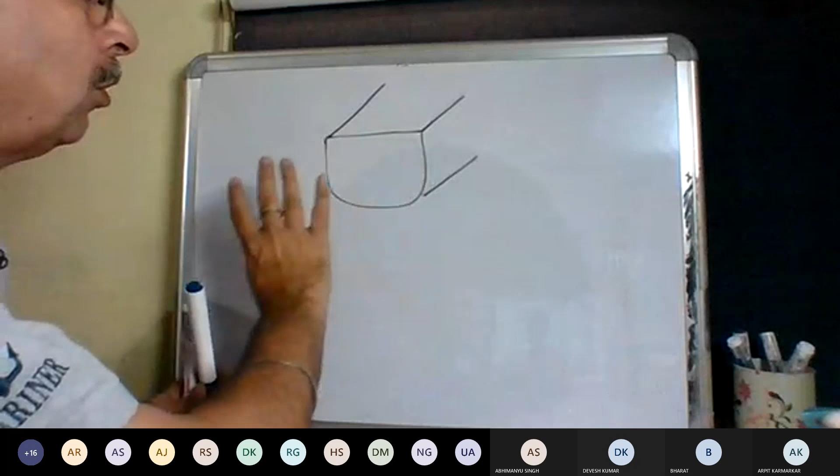Yes, it is now visible, sir. Okay, all right. So if this be the athwartship look of the vessel, and lengthwise like that, then this is your center, the keel blocks as they're called. They're called the keel blocks. So these go along the full length, right? Then you have...

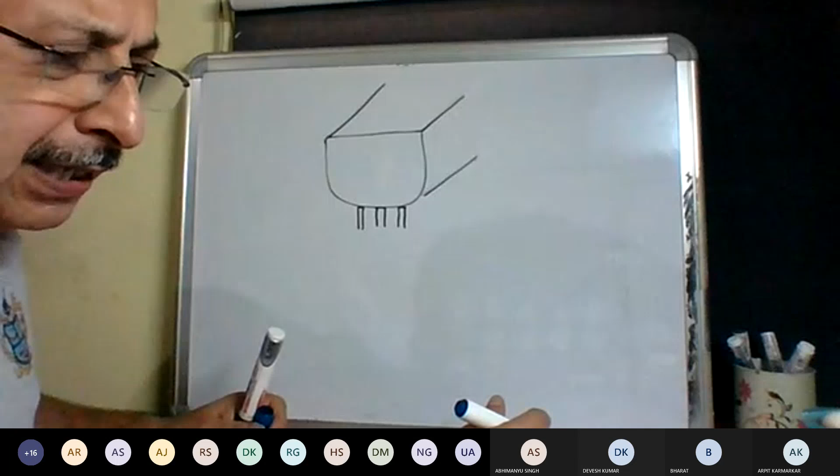Side blocks. These become the side blocks. And depending on the beam, because if our ship's beam is larger, then here you have what is called bilge blocks. So keel block, side blocks, bilge blocks.

Towards the bilge keel, when the curvature comes in the bilge keel, the outermost ones there are called the bilge blocks. Now these are also along the ship's length, all along the length of the ship, running the full length. They're all going along the length, right?

It depends on the beam of the vessel. If the beam is small, then side blocks won't be needed. But if the beam is larger, naturally the side blocks will keep increasing. So that depends totally on the size of the vessel.

Now what happens is, because P is acting like this, there will be a tendency of the vessel to bulge out like this.

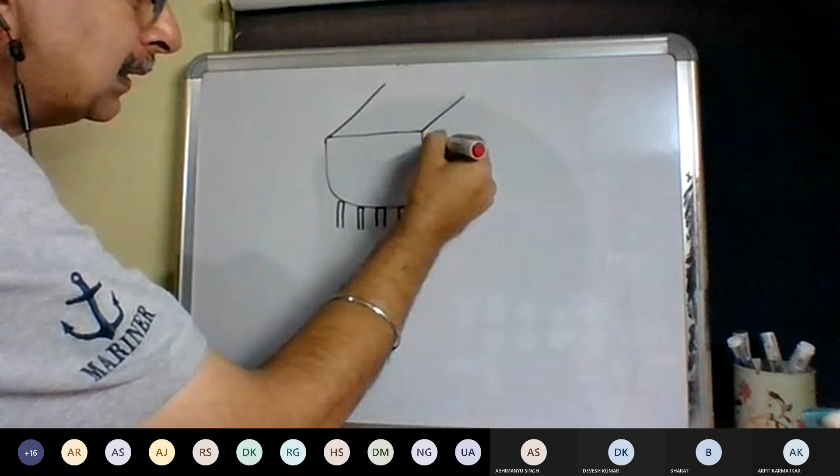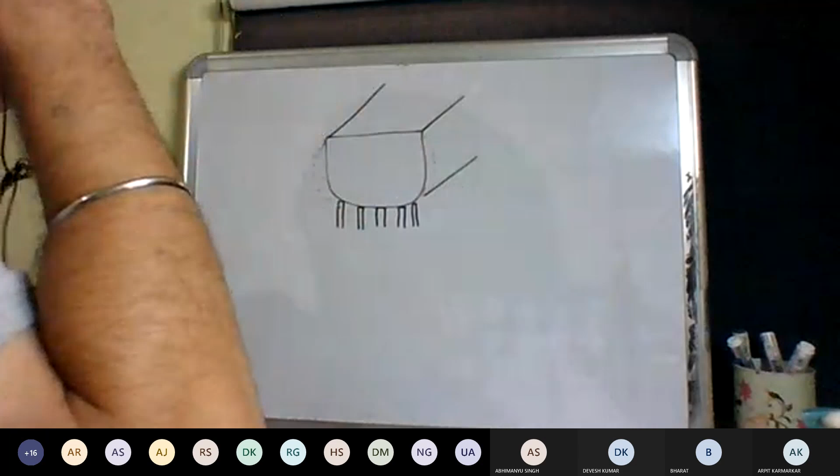There will be a tendency for the vessel to bulge out like this, because of the pushing force on the ship. So in order to prevent that bulging out, some of the older vessels, general cargo ships and all, used to be V-shaped vessels, not a regular box shape. The vessels were shaped like this.

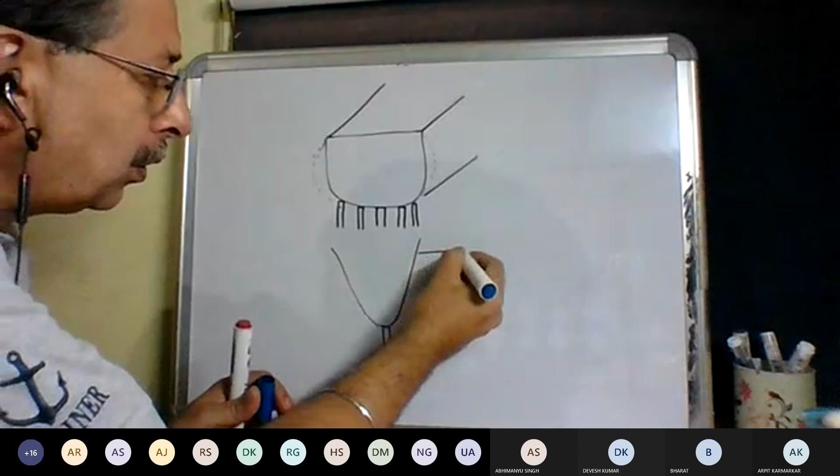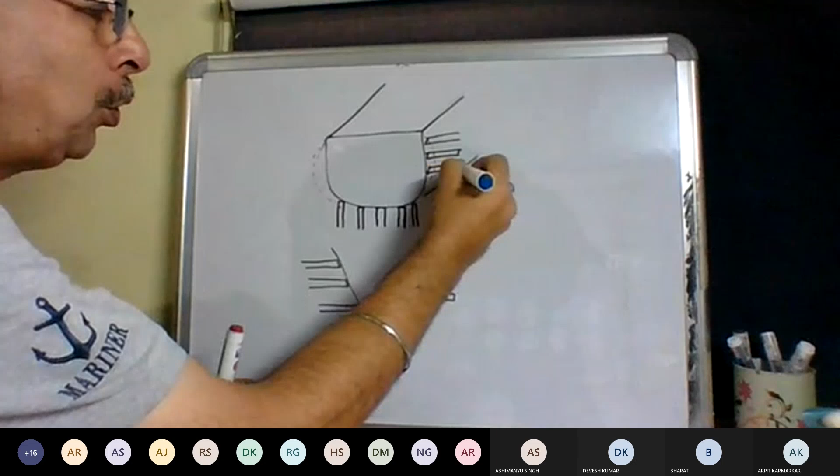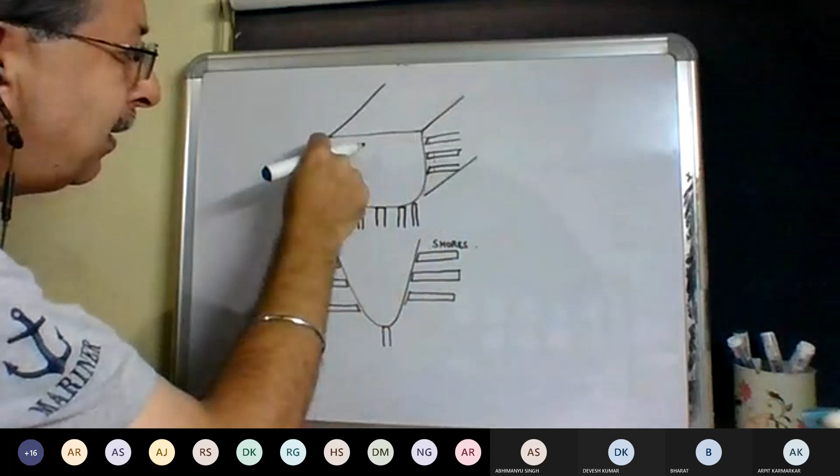So they would do two functions. One, they would wedge the vessel so as to prevent the toppling over. Two, they would prevent the bulging out of the vessel, or the bulging out of the shell plating.

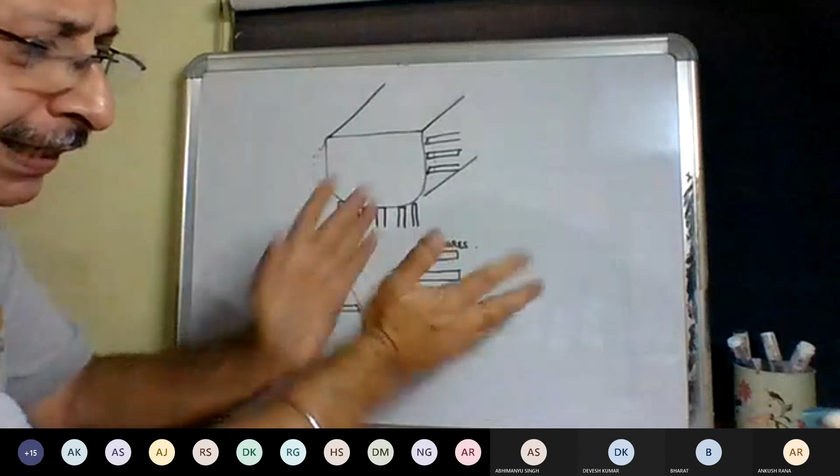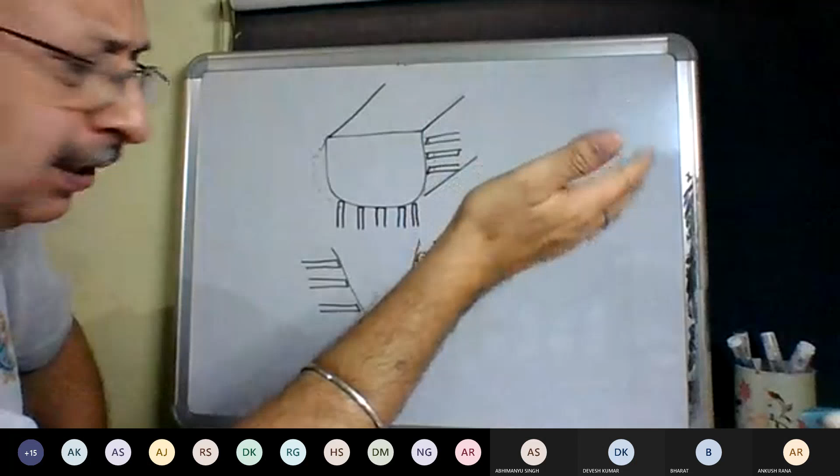So these vessels are susceptible to that, but box-shaped vessels are not. Shores used to be put in the 80s and 90s, and some primitive dry docks still do that. But advanced dry docks today don't have all this shoring business.

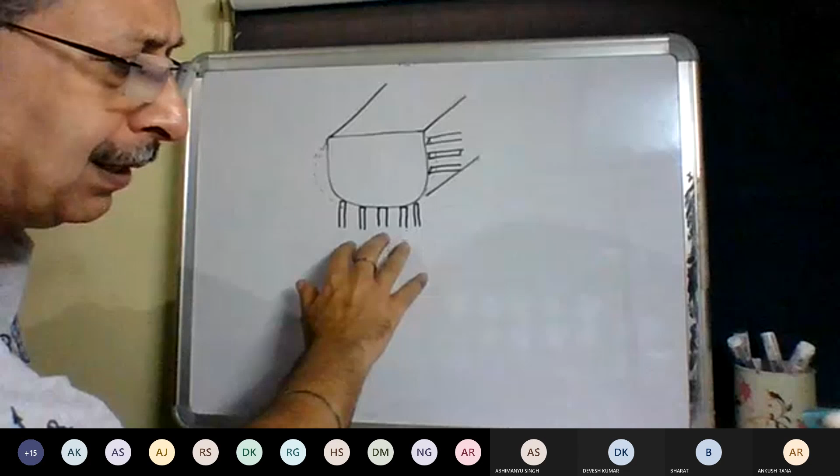So the support is provided by the blocks itself. You just increase the number of blocks, that's all. So in today's time, this shoring is not done. But yes, you should know what shorings are.

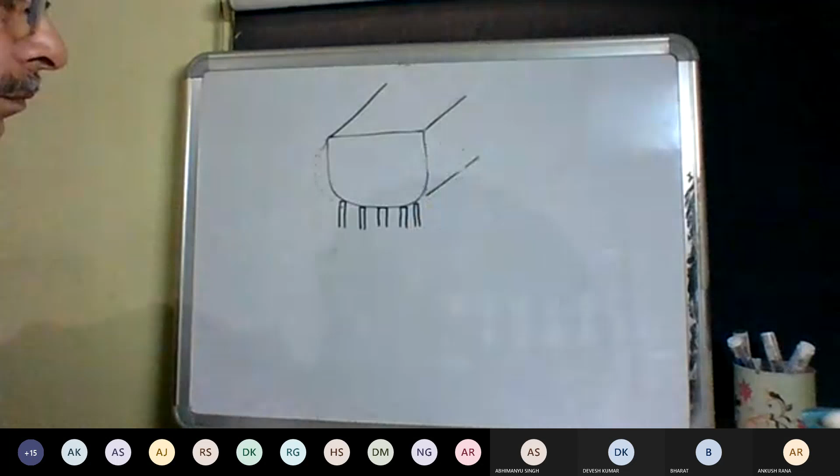Because they ask this in orals. How do we prevent this bulging in the box shaped vessels? How do we prevent bulging out of hull plates? No, you cannot do anything.

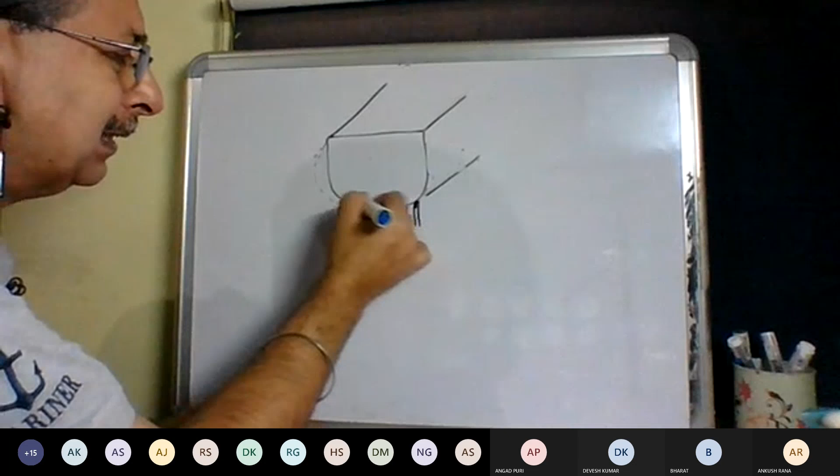What they do is basically put extra paddings on top of these blocks. Teflon paddings, rubber paddings, highly reinforced rubber paddings are put up over there. So they take care of that bulging out. You can't do anything else.

Also in olden times, the vessels used to dry dock for a very long period of time. Once a ship went to dry dock, it would go for 3-4 months. The dry docks were not as efficient as today. So if the vessel has a prolonged stay in dry dock on the blocks, she is more susceptible to this bulging out.

But today our dry docks are minimized. Bulk of the job is done at the repair berth, which is floating. So first we go to the repair jetty off the dry dock, and the work starts there. The engines are opened up, the units are opened up, and we go into the dry dock only for the underwater portion, nothing else. So in reality, the dry dock stay might be just 10 or 12 days.

The shipyard stay, the repair berth stay, might be 15 to 18 days. And therefore the total stay for the repair in totality becomes about a month. As a result, the bulging is less, because the vessel is exposed for a lesser period on the blocks. That is the situation today.

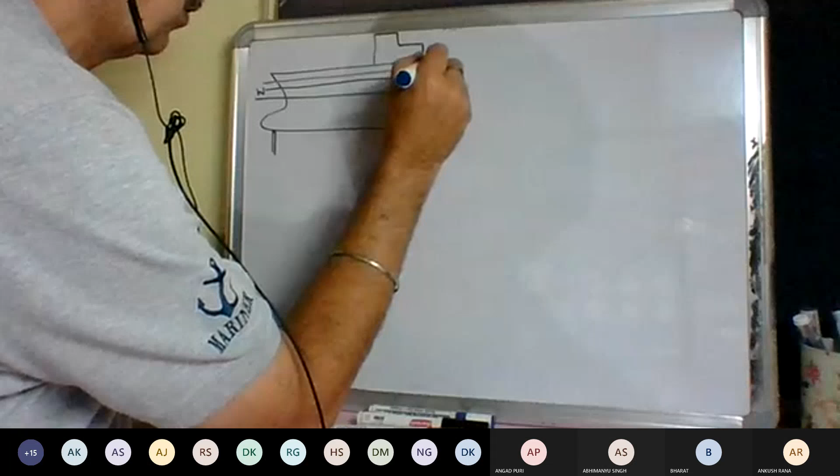Okay, so now let me touch upon one more element of the ship's stability, and that is GM. Let's say at waterline number 1, the KM of the vessel is 6 meters, and the KG of the vessel is 5 meters.

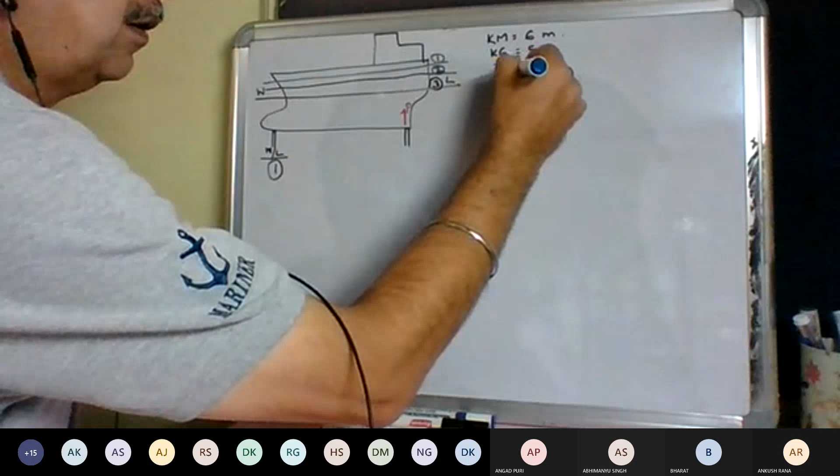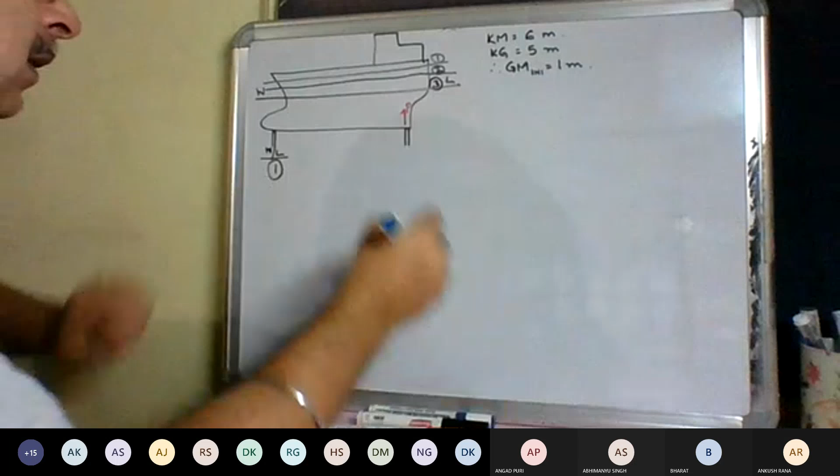Therefore, the GM initial is 1 meter. So at waterline 1, under the column of inference, write down: GM initial is equal to 1 meter.

I'm taking these values hypothetically. I'm just randomly taking some values to explain a point.

Now, when I come to waterline number 2, okay, P will start to act. Will there be any change in the GM of the vessel? That is the question.

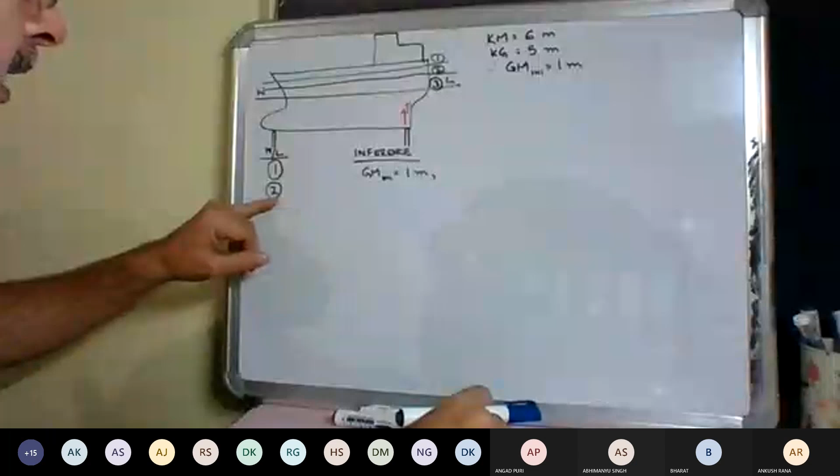What do you think? Sir, please repeat. What I'm saying is, at waterline 2, when P begins to act, as the ship slowly touches the block, will the KG change? If KG changes, GM will be affected. Now the question is like this.

In reality, the KG of the vessel does not change, because the displacement of the vessel is still 50,000 tons. If the displacement is constant, then KG is also constant. Yes sir, it will be constant. That is correct, sir.

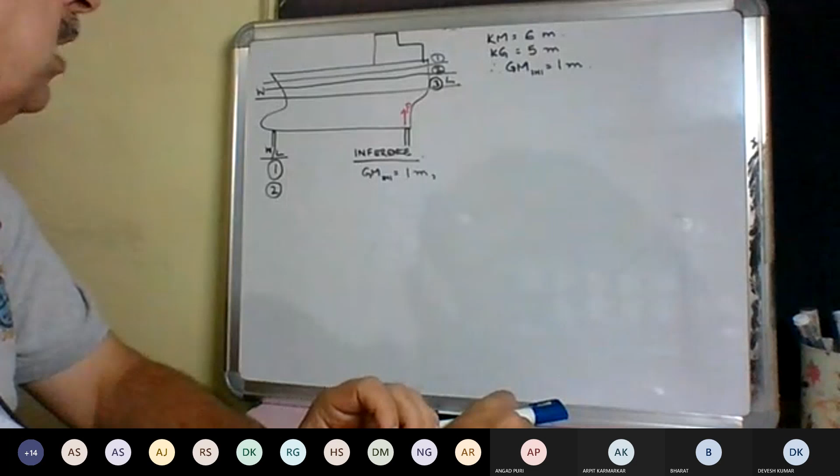Buoyancy will reduce and P force will increase, because I have not discharged any cargo. So therefore, the two basic principles in dry dock are: W remains constant, KG remains constant.

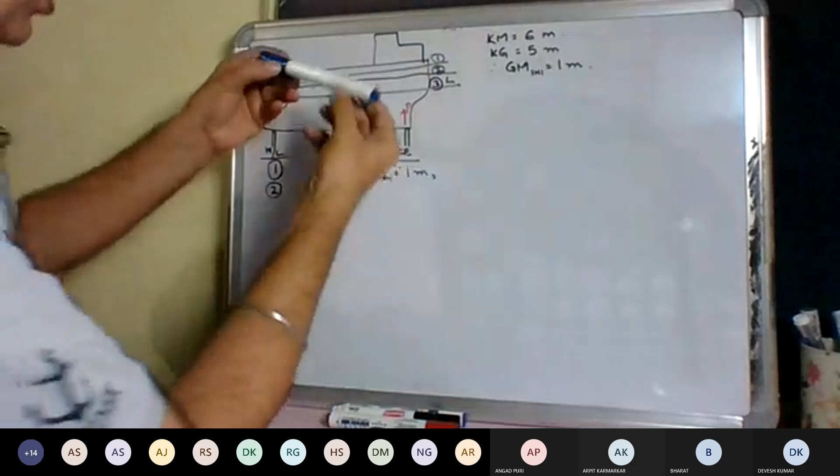Okay, now what happens is this P tons of force which is acting upward is changing the trim of the vessel. And since the trim is changing, the waterline is changing.

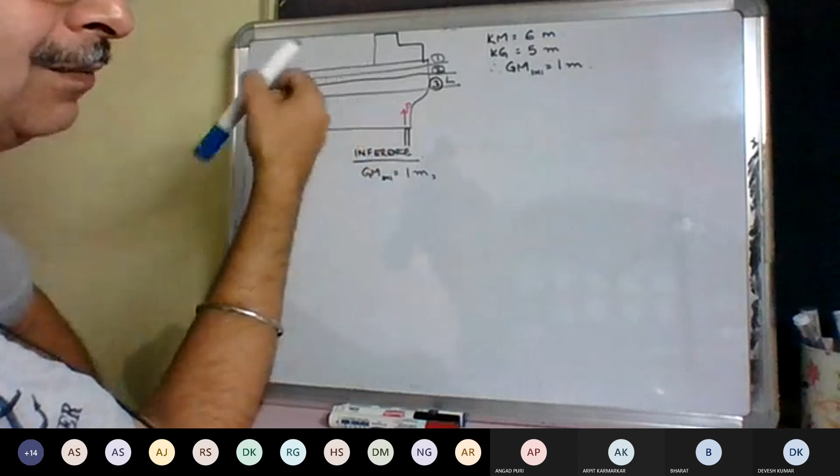Earlier, the waterline was inclined like this. Now the waterline is slowly becoming less inclined and coming to even keel. So as a result, I know KM is also equal to KB plus BM.

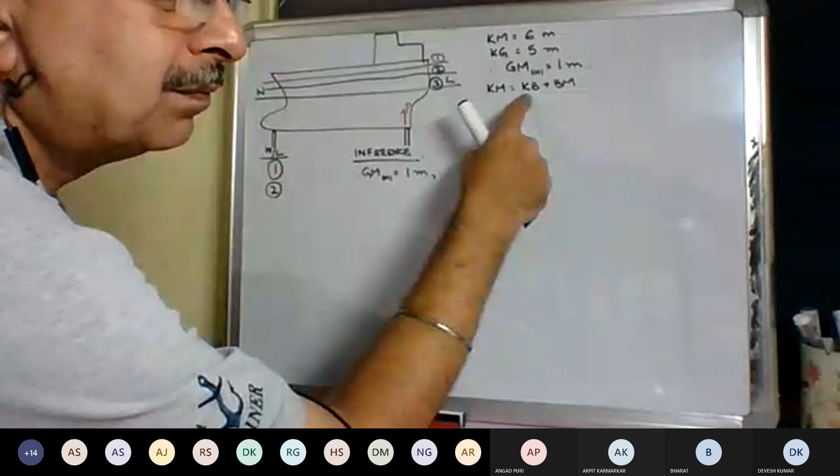So my waterline is changing, so KB is changing, BM is also changing, so KM is changing. If KM is changing and KG remains constant, that means GM is changing and GM is reducing.

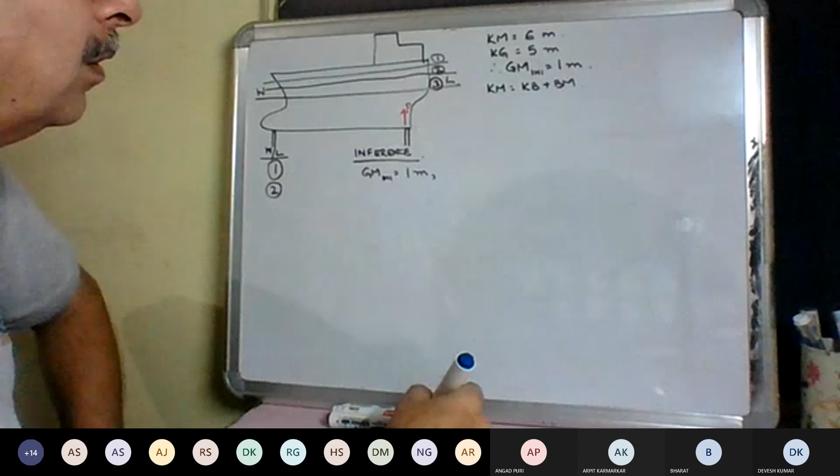Yes, yes sir, correct. Sir, please repeat again, sir. I'll repeat once again.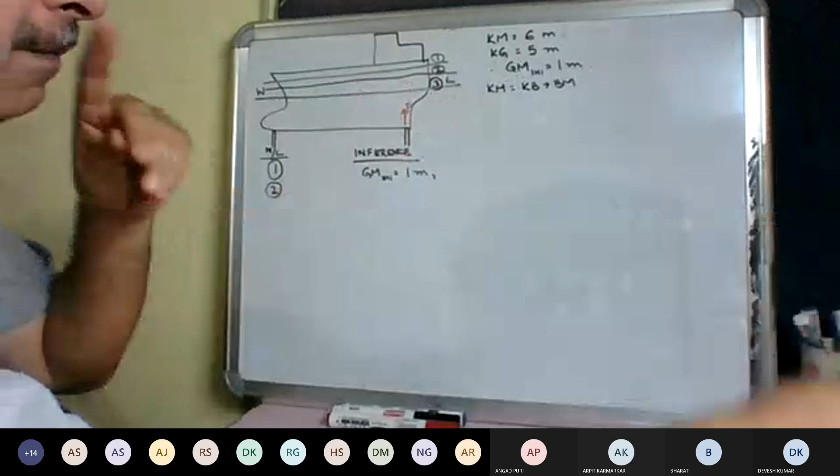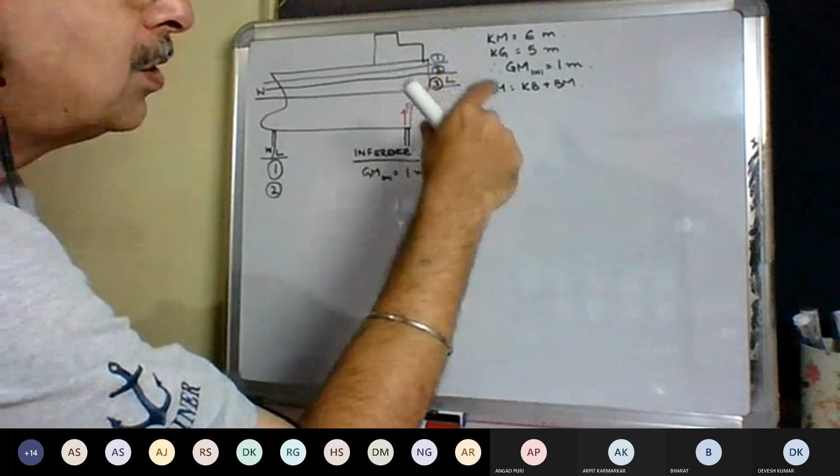KM is also equal to KB plus BM. My waterline is changing, my waterline was initially inclined like this, now it is becoming like this. Because my ship is changing like this, my waterline is changing, my KB is changing, my BM is also changing, so that means my KM is changing, KG is constant, so my GM is changing.

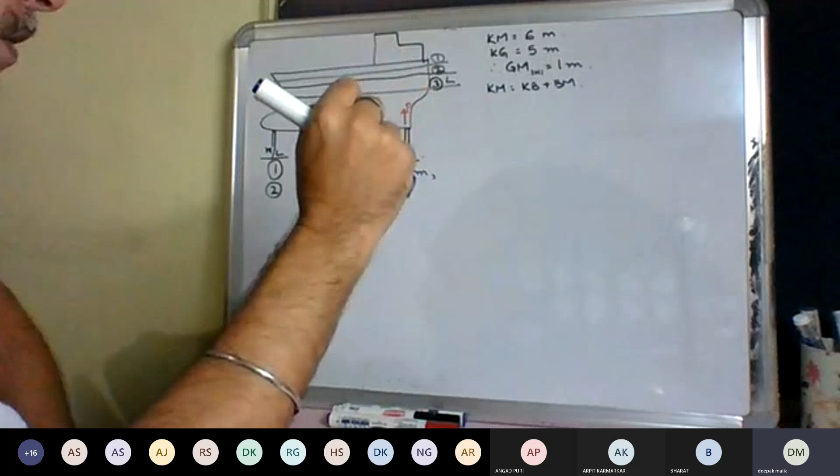Yes sir. My GM... excuse me sir, let me just finish the sentence. So because my KM is changing, my GM is also changing. Because of that, KG being constant, my GM is actually reducing.

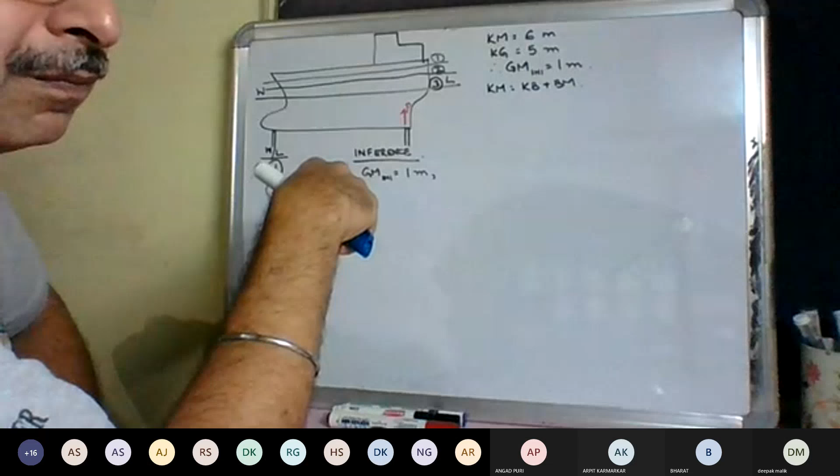This reduction of GM is called the virtual loss of GM. And so, therefore, from waterline number 2 onwards, when the critical period commences, virtual loss of GM commences.

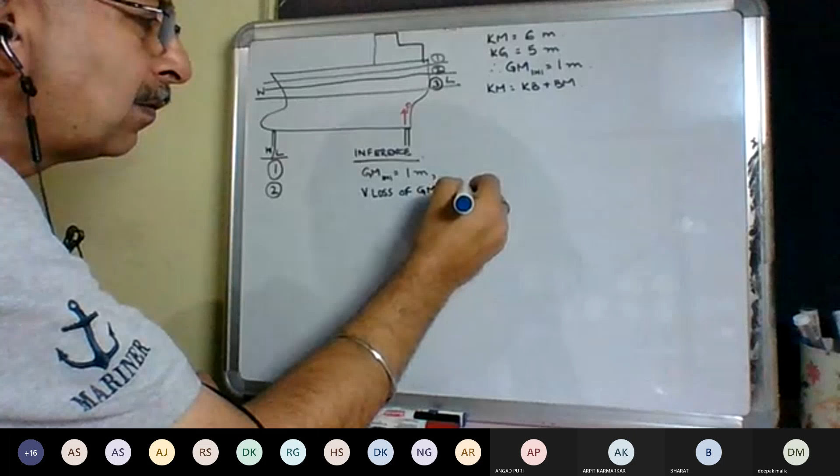Alright, now you ask me questions. Why is the KG constant at the aft when the ship touches and slowly comes down towards the forward block? Because slowly G shifts from aft towards the center.

What is KG by definition? What is G? G is the center of gravity. But by definition, it is called the geometric center of the mass or weight of the vessel. I have not changed any mass distribution of the vessel. If my ship has this mass and the weights around it, I haven't changed anything, so I haven't changed its geometric center either.

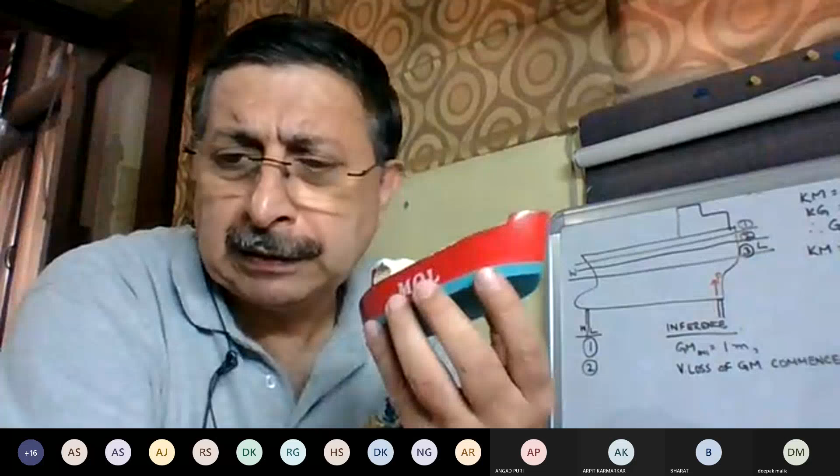Maybe they're considering that there's a transfer of weight taken by the block, but it is not actually. It is a transfer of the weight by the block - exactly right. So a weight is getting transferred from the vessel to the block gradually. But that is virtual, sir - it is not actually happening. Yes, so that's why KG is constant.

Therefore KG is constant. Therefore KM is changing because of the waterline. Therefore the loss of GM is called a virtual loss of GM.

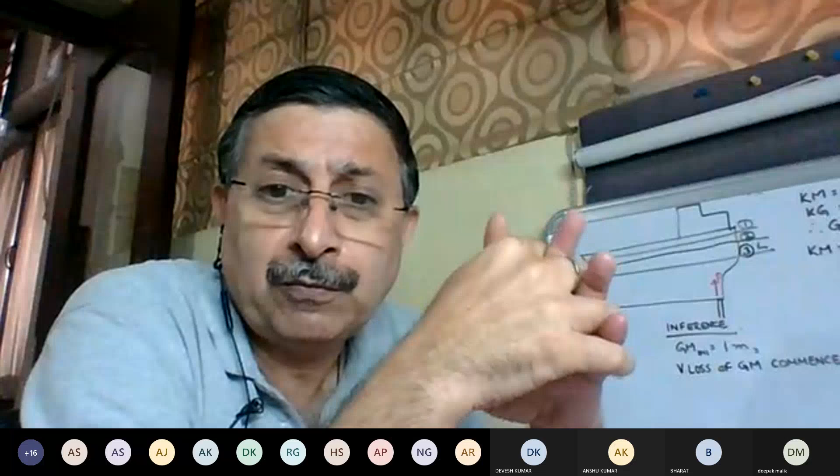Now, where else have you heard of a virtual loss of GM, this term? Free surface effect, sir. Absolutely right, free surface effect. When my ship is rolling, if there are slack tanks with fluid inside, it is liable to shift, and because it is liable to shift, therefore the GM can fluctuate due to the KG fluctuation.

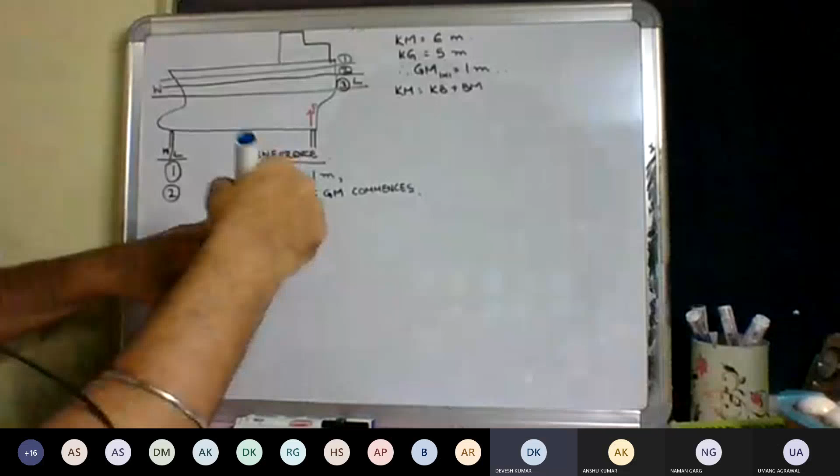So in Waterline 2, write down virtual loss of GM commences. That means the GM will constantly keep losing. Therefore, the GM which is remaining will keep on reducing. So the residual GM will decrease. Do you agree to this statement? Yes, sir.

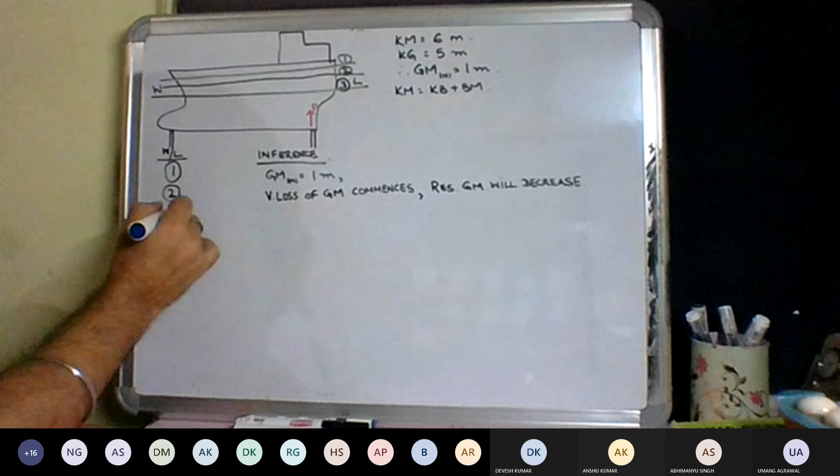Now, as the waterline falls, P will increase. The virtual loss of GM will increase. And if virtual loss of GM increases, the remaining residual GM will keep decreasing. Agreed? Yes, sir. Okay, some waterline, this residual GM.

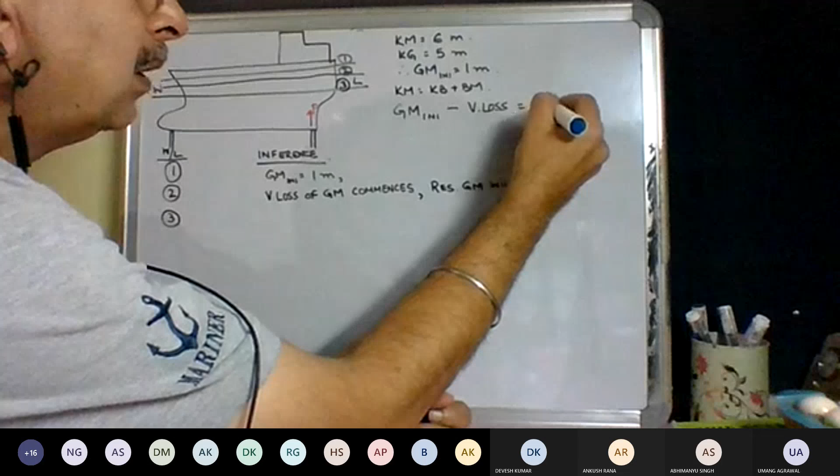Sir, what is this residual? I didn't get it. Residual, so GM initial minus the virtual loss will give me the remaining GM, the residual GM. Okay, so if my initial GM is 1 meter, and my virtual loss of GM is 0.25 meter, then what is my remaining GM? 0.75. 0.75.

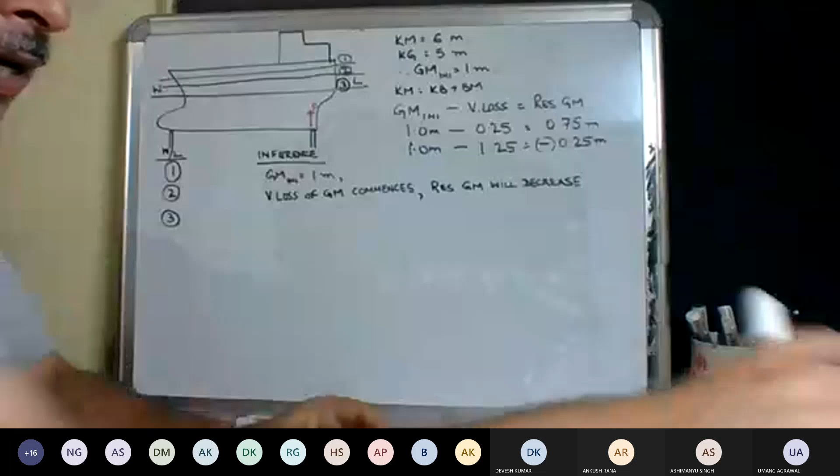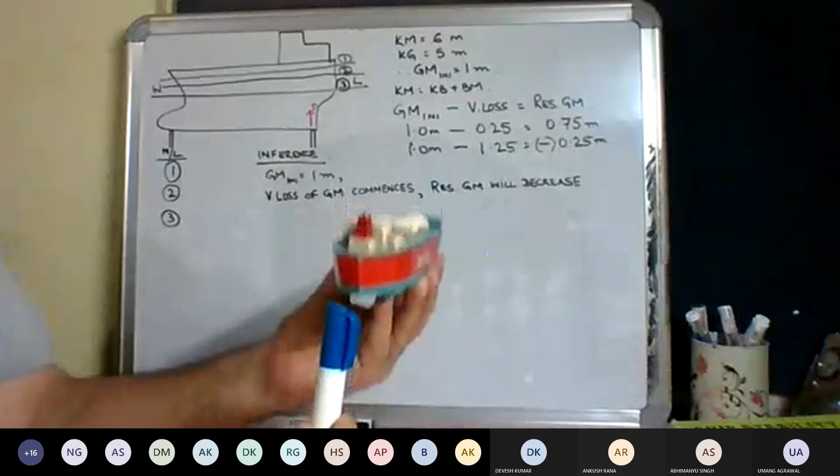Supposing my GM initial is 1 meter, and my virtual loss of GM is 1.25 meters, what is my residual GM? Minus 0.25. Yeah, agreed on this? Yes, sir. So what will be my situation at this time? I am aft touched, forward not yet touched, still in the air, and I have got a negative GM. I am unstable. What will happen? The vessel will topple over. Agreed? Yes, sir.

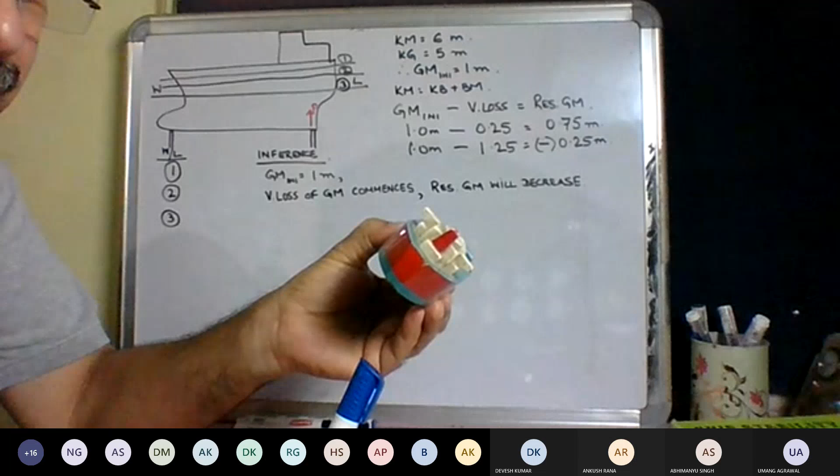This is the criticality of the critical period. I don't want this to happen. Hence the name critical period. When does critical period occur? From 2 to 3. Yes, sir. So I don't want my residual GM to become negative between 2 and 3.

So what do I want? At waterline 3, my residual GM should be positive. That means my residual GM should be greater than 0. That is what I want. If my residual GM should be greater than 0, that means I want it to be stable, I want this to be positive. My virtual loss should be less than GM initial.

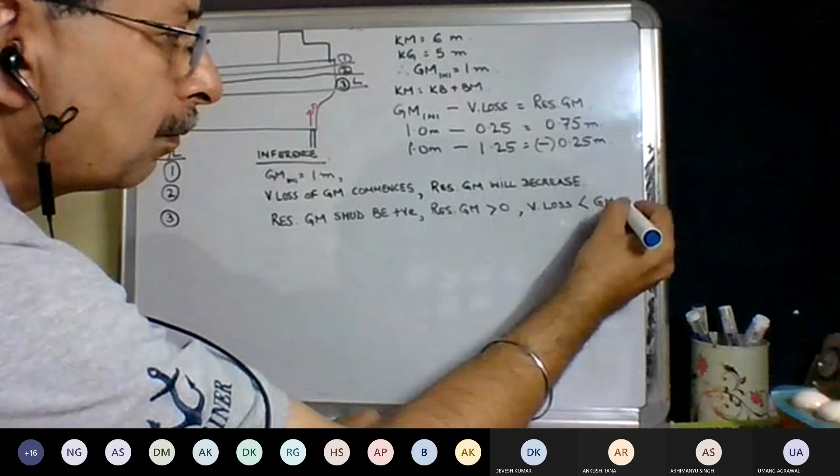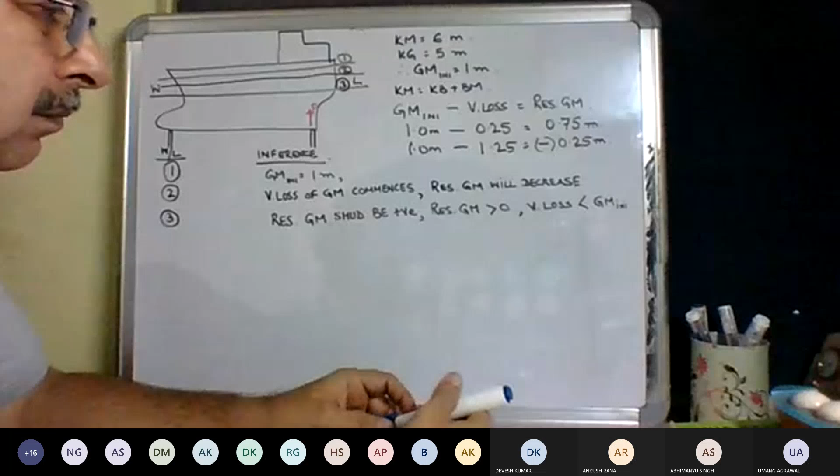That means my virtual loss should be less than 1 meter. So long as my virtual loss is less than 1 meter, my residual GM will always be positive. Since my residual GM is always positive at waterline 3, I am okay. I'm okay to dry dock. Yes, sir. So at waterline 3, my RGM or residual GM should be positive.

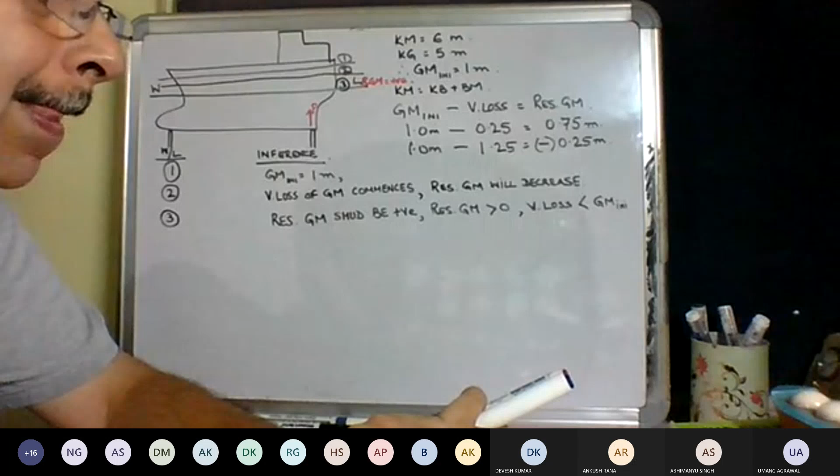So this is the biggest challenge for the mate, to check RGM at waterline 3. If this is positive, it's okay to dry dock, no problem. Is it okay? Yes, sir. Right.

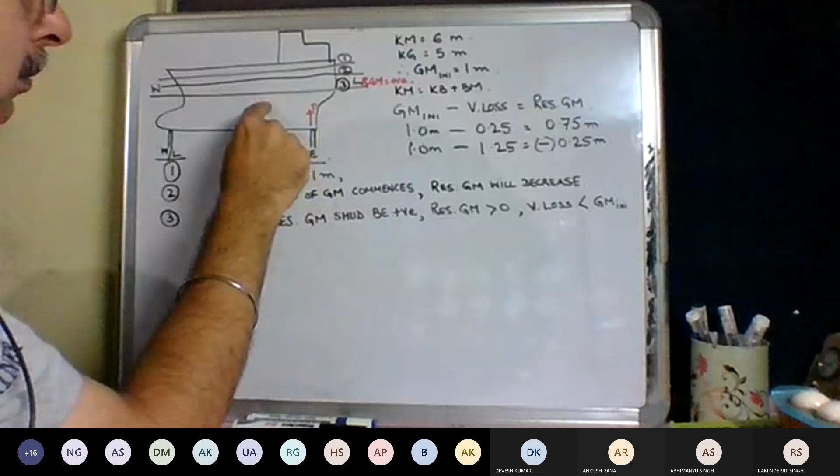After this, the dry dock then pumps out a little bit of water. As soon as a little more water is pumped out after waterline 3, this virtual loss will increase further, and RGM will decrease further. A time will come when virtual loss will become equal to GM initial. That waterline is called waterline number 4. So at waterline number 4, the residual GM will become equal to 0. Virtual loss of GM will be equal to GM initial.

Supposing 1 meter, equal to 1 meter. Is it okay?

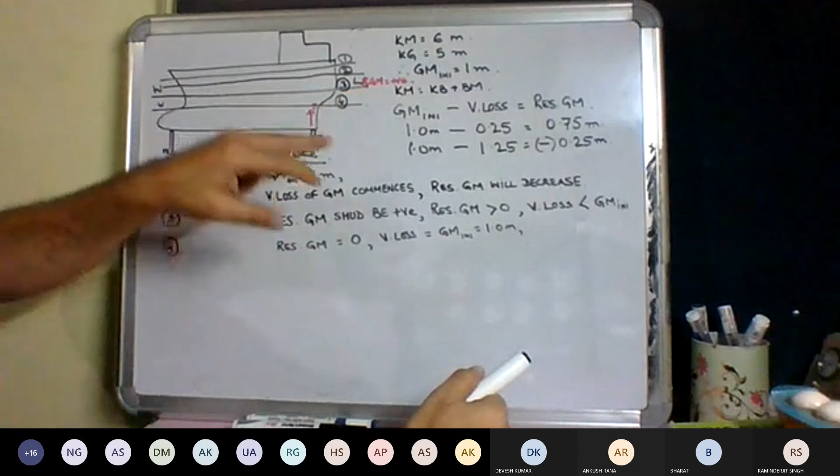सर एक बार नंबर 4 फिर से समझा दीजिएगा। ओके। सो 3 पे मेरी RGM पॉजिटिव थी, लेट्स से पॉजिटिव 0.25, supposing. तो I was ok to dry dock. अब उसके बाद जब पानी और नीचे गया तो वर्चुअल लॉस और बढ़ा, वर्चुअल लॉस और बढ़ा तो RGM और घटा। सो RGM 0.25 से 0.20 हो गया। फिर मैंने पानी और डाउन किया, फिर 0.15 आया, फिर 0.1 आया, फिर 0.05 आया, एक टाइम आएगा जब RGM 0 हो जाएगा, दैट इज waterline number 4।

RGM is 0. That means the virtual loss of GM is equal to the initial GM. V loss is equal to initial GM. Initial GM was 1 meter, so virtual loss is also 1. RGM is 0. This will be waterline number 4.

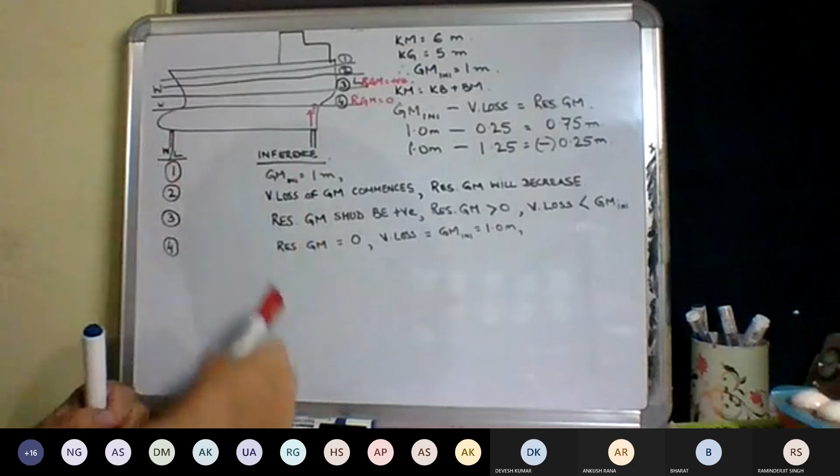RGM is 0. सर अभी नंबर 4 पे all blocks already touch or not yet? Already touched, वो 3 पे टच कर गए थे। P बढ़ चुका है, waterline 4, P4 is greater than P3. Bravo 4 is less than Bravo 3. Trim is 0, वो पहले ही हो चुकी थी। Draft forward will be equal to draft aft, will be equal to dock water height, will be equal to hydrostatic draft। अगर इनमें से मुझे कोई भी एक चीज मिल गई तो मुझे बाकी सारी चीजें मिल जाती हैं।

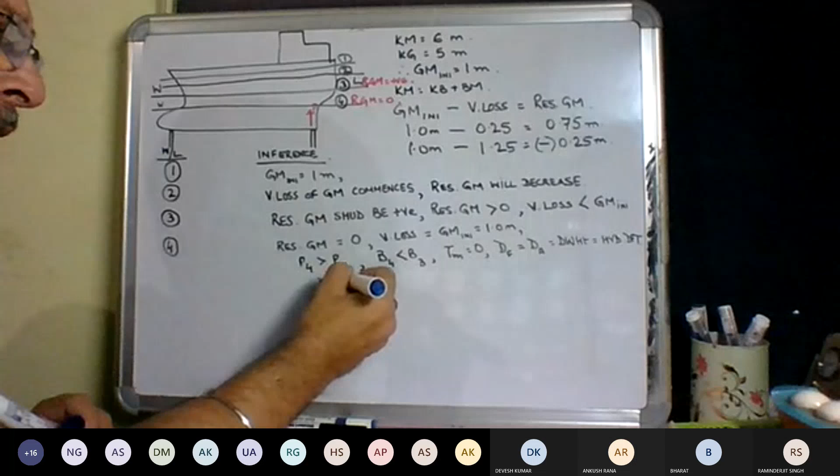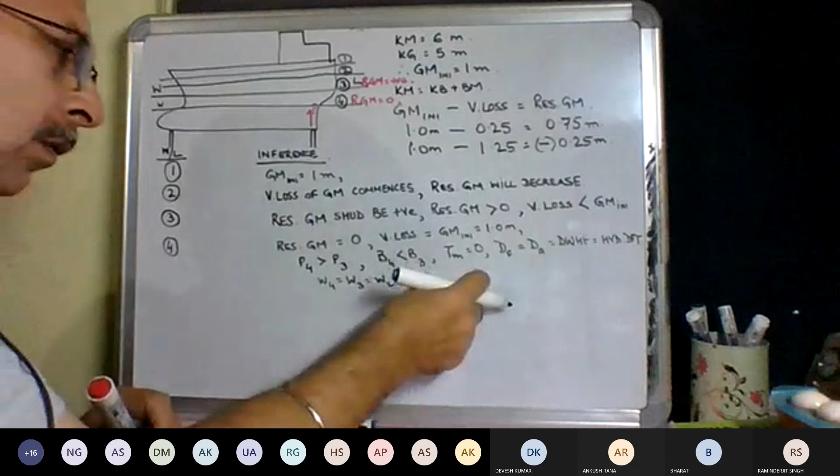Displacement remaining constant. W4 is equal to W3 is equal to W2 is equal to W1. Displacement throughout this entire process is constant. Kg is constant, not changing. Is this okay? Yes, sir. Any doubts? Up to waterline 4.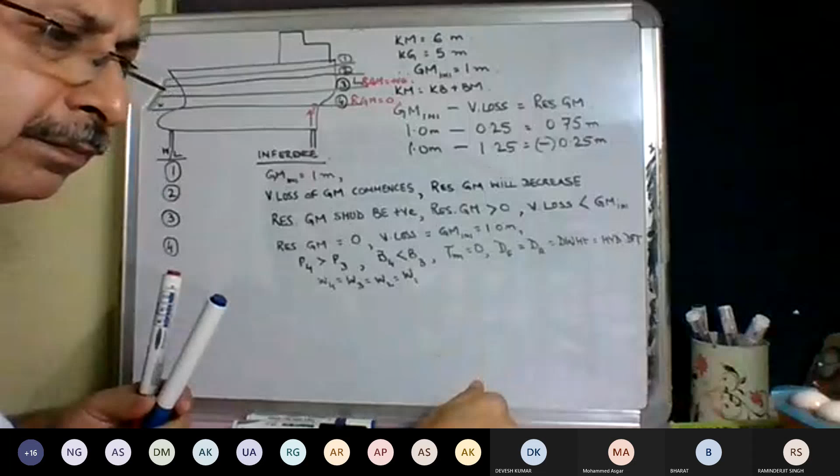No, sir, okay. अब इसके बाद dry dock फिर pump out करता है। तो जैसे ही 4 के नीचे जाएगा पानी, V loss बढ़ेगा, RGM will become negative. Yes, sir, correct. So she'll become unstable. Yes, sir, but she's already sitting all over on the blocks. So it is okay, she won't topple over. This is what we wanted to achieve.

This is what we wanted to achieve. We wanted her to be seating all over on the blocks when the GM becomes negative. We wanted to achieve that। तो सर नंबर 4 पे it is sitting on all the blocks. Correct। तो GM पॉजिटिव था तो हम तो ऑलरेडी पहले से सेफ पोजीशन पे हैं, हाँ वो 3 से ही शुरू हो गया था, हम सेफ पे आ गए थे। 3, I wanted to achieve 3 first। 3 में पॉजिटिव हो गया था, मैं I was okay. So this is the sequence of my dry docking. I should go from 1 to 2, 2 to 3, 3 to 4, 4 to 5.

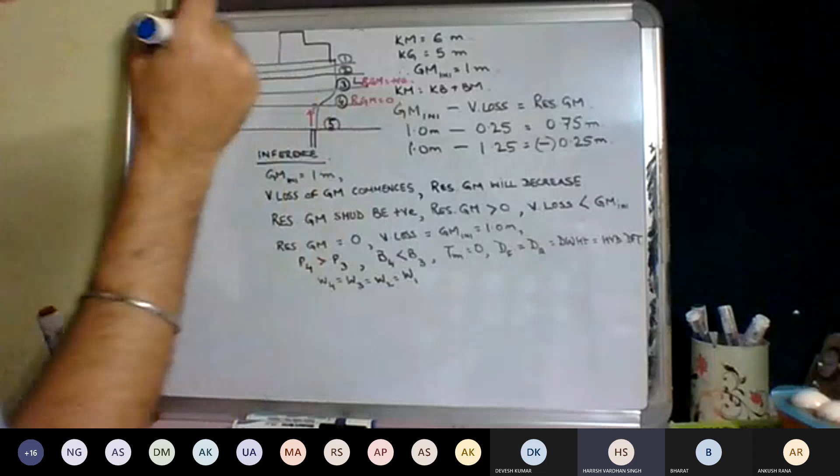So after 4, the GM will become negative. RGM will remain negative. And as the waterline keeps falling, it will become more negative. My question to you is, at waterline 5, what will be the RGM?

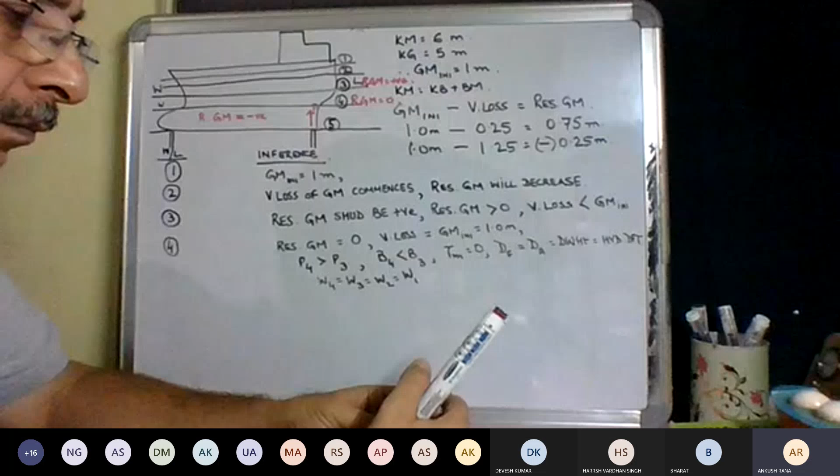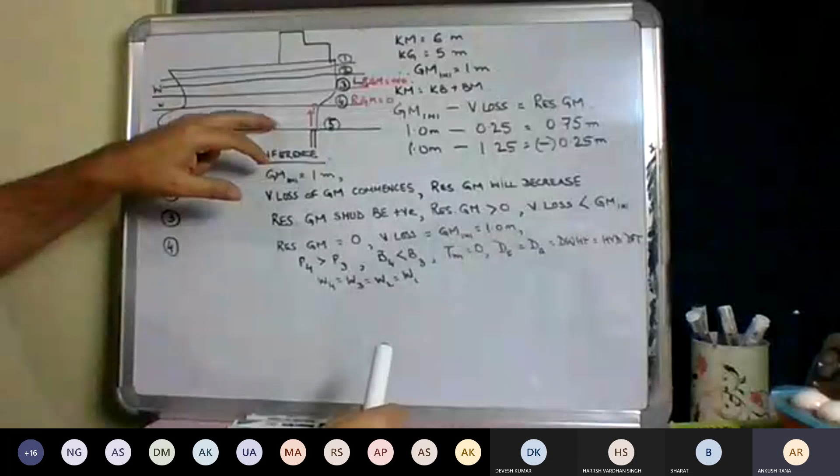What will be, sir? Sir, it will be negative, the RGM. At waterline 5, GM will be negative, sir. RGM is negative there already। हाँ negative हो गया 4 पे के बाद, अब ये बढ़ता गया, बढ़ता गया, बढ़ता गया बढ़ता गया, negative negative में बढ़ रहा है। ओके अब 5 पे आया, तो 5 पे क्या होगा? Sir, it will be equal to same as kg initial, but kg negative.

Initial 5 meters, already हट जाएगा क्योंकि so everything is out now, water is out, everything is out. So what will happen? Minus 5 meters, sir. नहीं, something else. So at waterline 5 there is no buoyancy. It will be 0, sir. Since there is no buoyancy, M vanishes. M will vanish. So therefore, GM vanishes. Vessel will only have kg.

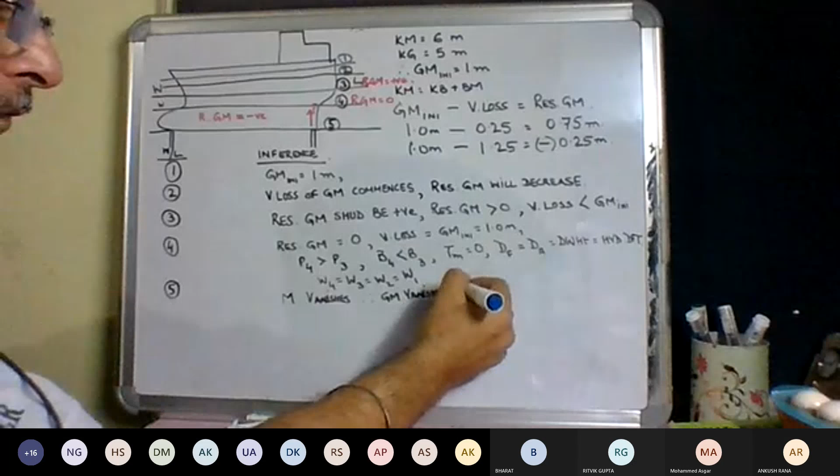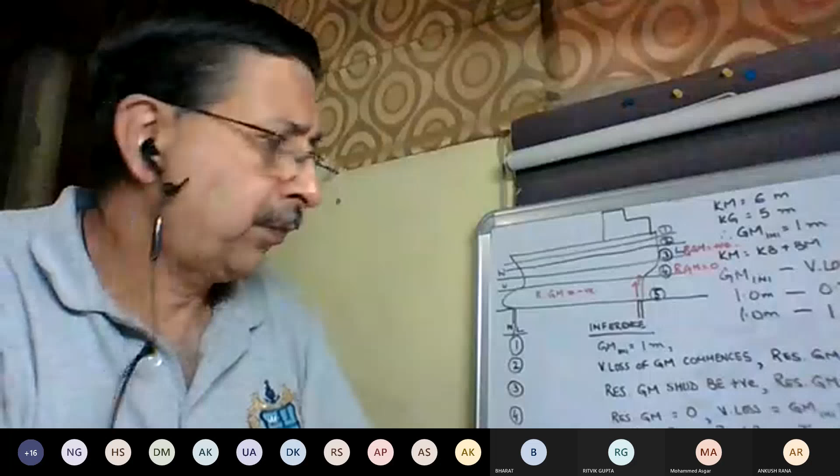ये समझ में आया? Yes, sir. So it is like this vessel lying on this table like this, that's all. This vessel has a certain kg right now. Okay, I put this in the water, it will have a km also, and therefore this vessel will have a GM. I take it out of the water, she doesn't have any GM, because there is no km. मैंने इसको टेबल पे रख दिया, खाली kg है बस इसका। ठीक है? Is that okay? Yes, yeah this is okay. हाँ जी, now any doubts?

So again, if we start filling water at undocking, after dry dock, so again it will start from negative, go to positive. Absolutely right. अब रिवर्स, जब हम flooding करते हैं, जब हम sail out करना है, तो what will happen first? 5 आएगा waterline, फिर negative होगा, फिर 4 आएगा, 4 पे RGM 0 होगी, फिर 4 के बाद ऊपर चढ़ेगा पानी, ठीक है, चढ़ेगा चढ़ेगा चढ़ेगा, GM पॉजिटिव होगी, waterline 3 आएगी, and bow will be about to lift off।

And जैसे ही lift off कर जाएगा, फिर trim बढ़ती जाएगी, और एक टाइम आएगा जब aft भी lift off होने वाला होगा, तो waterline 2 आएगी, and then 1, and then the vessel will sail out। इसलिए therefore we do not carry out any bunkering or any fresh water intake or anything inside the dry dock. We always do it at the anchorage. Why? Because जिस कंडीशन में, जिस trim में मैं अंदर गया, उसी कंडीशन से मैं बाहर भी निकलूंगा, ताकि critical period वही रहे। That is the reason।

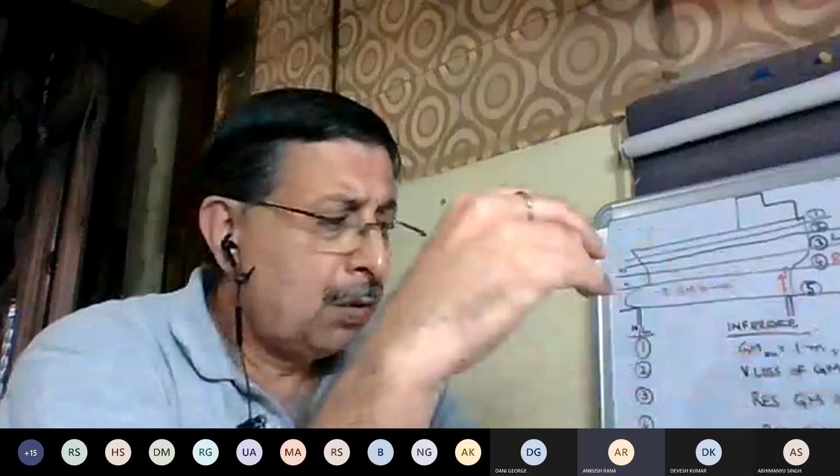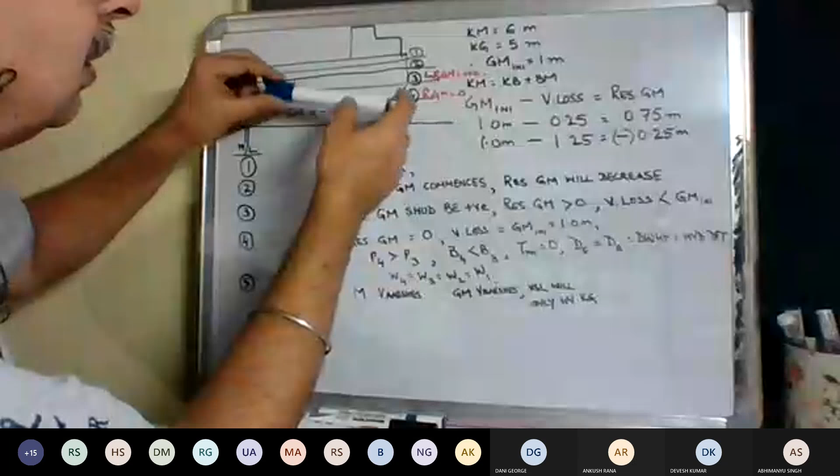Sir, I have one request. Can you please repeat how this virtual loss of GM started? Just that point, can you explain? So virtual loss of GM started because my waterline is changing between 2 and 3. Yes sir, waterline is changing. So my waterline is changing, and the draft is changing also between 2 and 3.

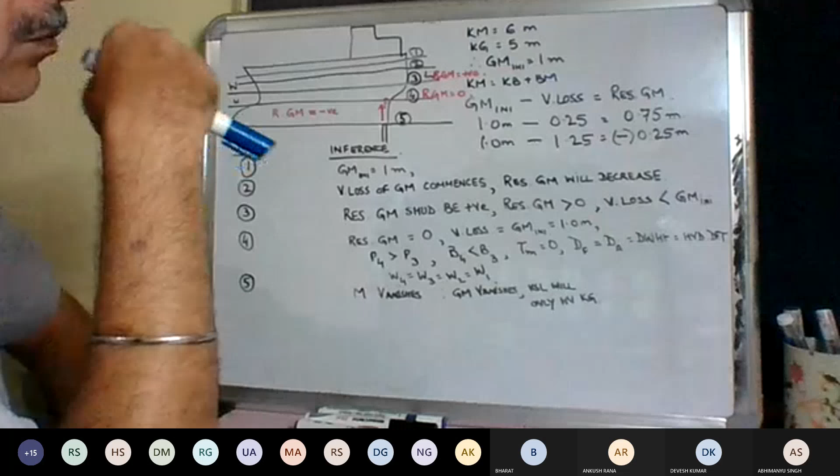Yes sir, so because my draft is changing, my KB is changing. Yes, that's correct sir, so because my KB is changing, my KM will also change. Because KB plus BM is equal to KM. Yes sir, so KM will change. KG is constant. Yes sir, so GM will change. Okay sir, that is the virtual loss of GM.

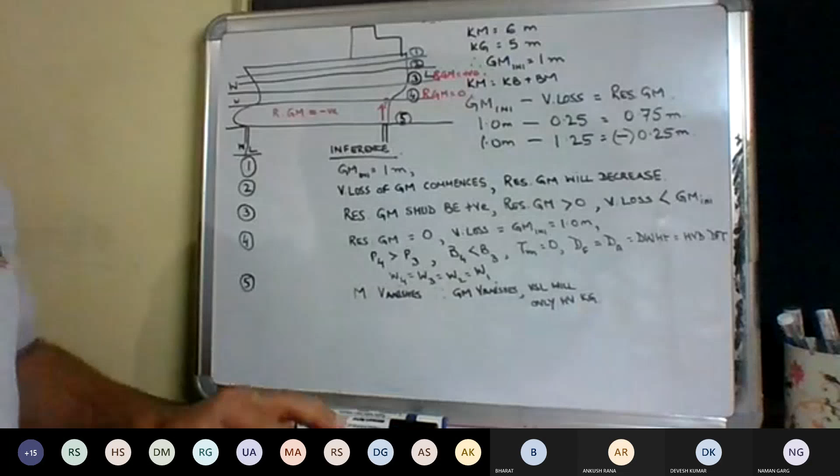Okay. Is that okay? Yes sir. If we enter and exit the dry dock with the same trim, then the blocks below, sir, their length would be different, right? Forward should be a bit taller, right sir? Length means, what do you mean by length? The height of the block. So in reality the height is different.

Okay, but right now for beginning dry docking, I am assuming that all the heights are the same. In reality, the heights vary. Yeah okay sir. As per the ship shape, sir, no sir, because of the ship shape. Absolutely correct.